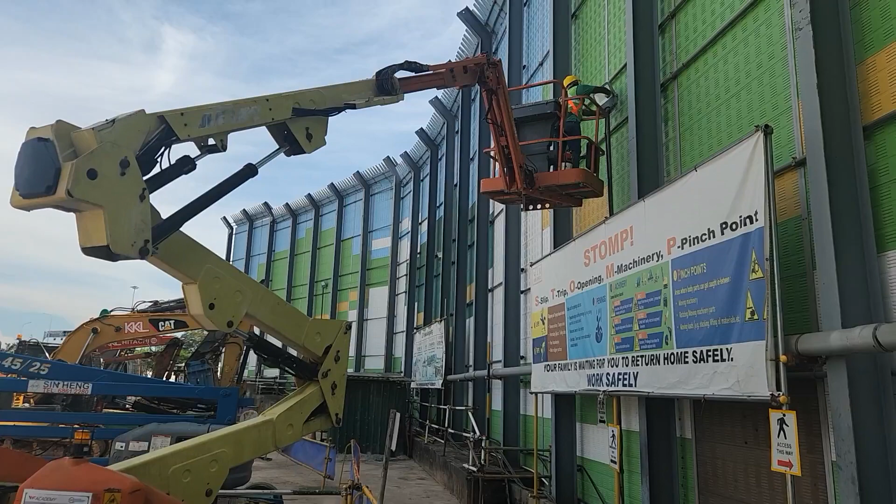Working at height means working at any height from which there is a risk of falling. Work at height is a key area of concern for workplace safety in Singapore, as falls from height have been the top contributor to workplace deaths in Singapore over the years.

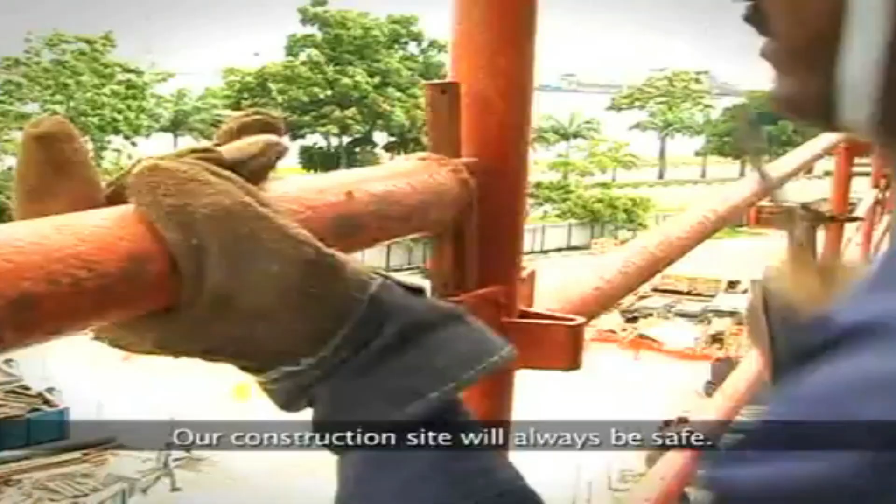Working at heights is an activity we can't avoid because of the nature of our work. However, we can work at heights safely if we have all the necessary controls in place before we begin working at heights. In this video, we will discuss the hierarchy of control for safe working at heights and the different types of fall prevention systems.

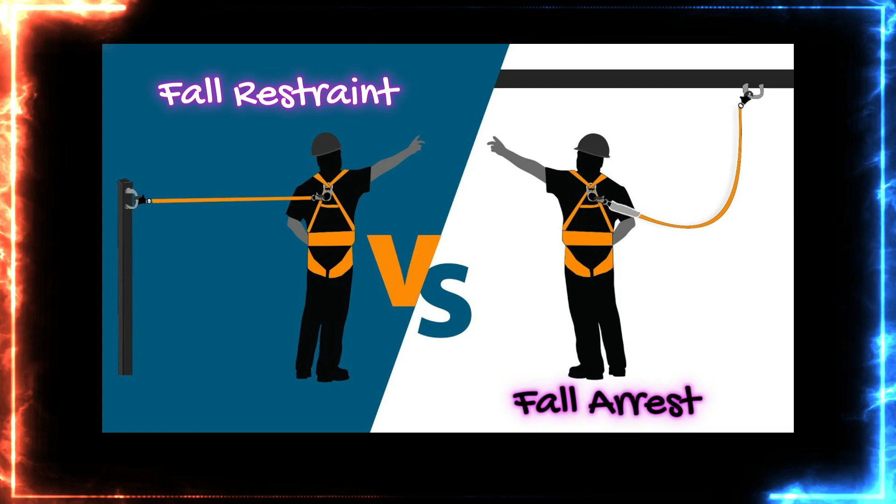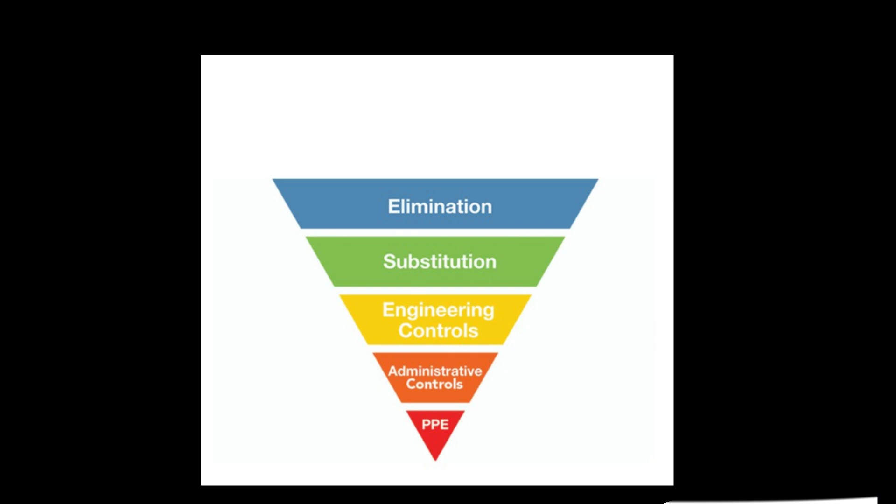Let's start with the hierarchy of controls. The hierarchy of controls is a method of identifying the most effective method to protect workers from falling from heights. They are arranged from the most effective methods to protect the worker from falling from height to the least effective methods. They are elimination, which is most effective, that all hazards of working at height are removed.

Followed by substitution, which can be achieved by changing the process to replace the hazard with one that presents a lower risk. Engineering controls, which prevent hazards from contacting workers by physical means that reduce the likelihood of falling from heights. Administrative controls, which are procedures, training or warnings that raise safety awareness when working at heights and reduce exposure to the hazard by following procedures.

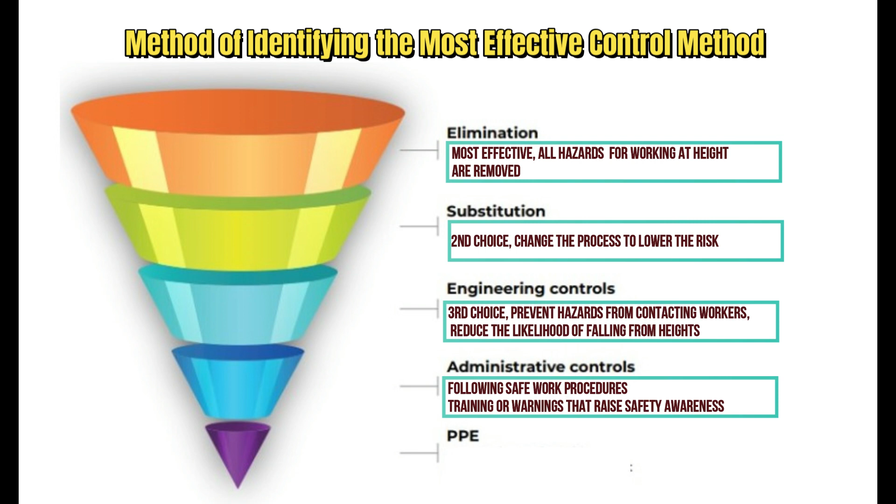Personal protective equipment, which are devices for protecting workers, such as lifelines and safety harnesses. They should be used only as a last resort and may be necessary at the same time as other control measures. Wherever possible, we should always use the most effective control method in all our work at heights.

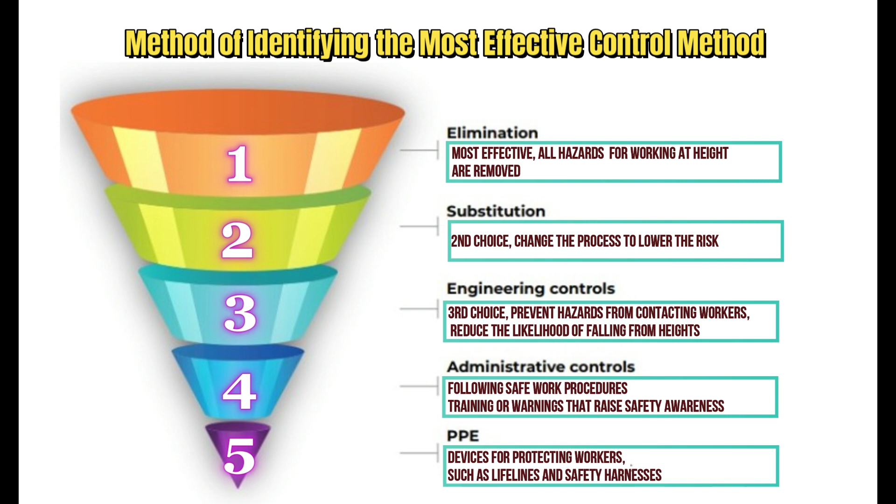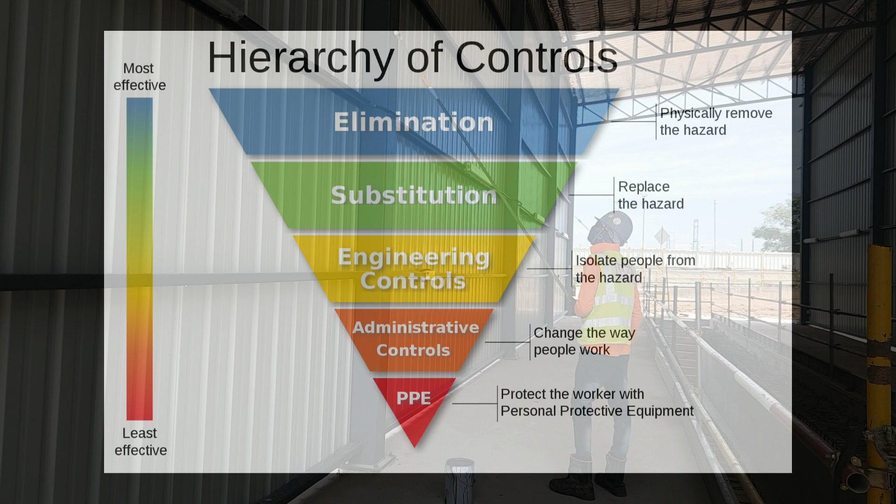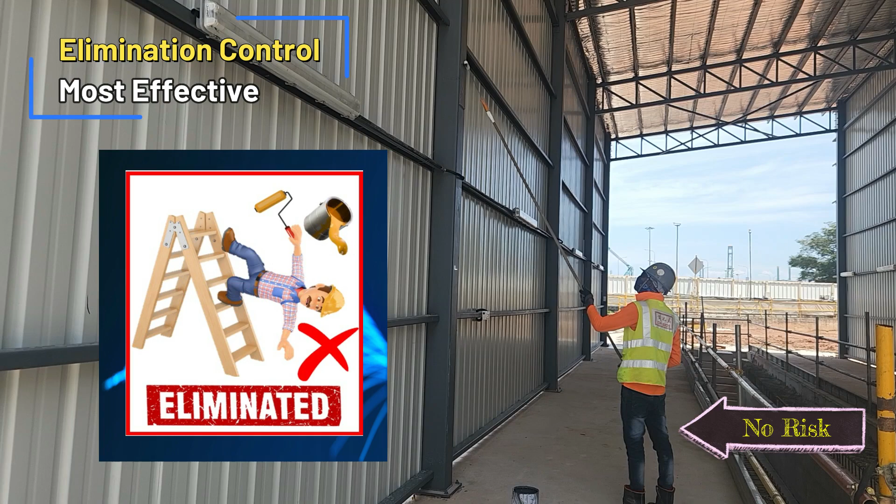Next, let's look at some examples of how to apply the hierarchy of control for working at height. Let us begin with the most effective control, that is, elimination. Elimination control provides the highest level of protection and the most effective control. As you can see from the video, the worker uses a paint pole and stands on the ground to do the painting work instead of working at height. By using this control, the hazard of working at heights has been removed, so there is no risk of falling from heights.

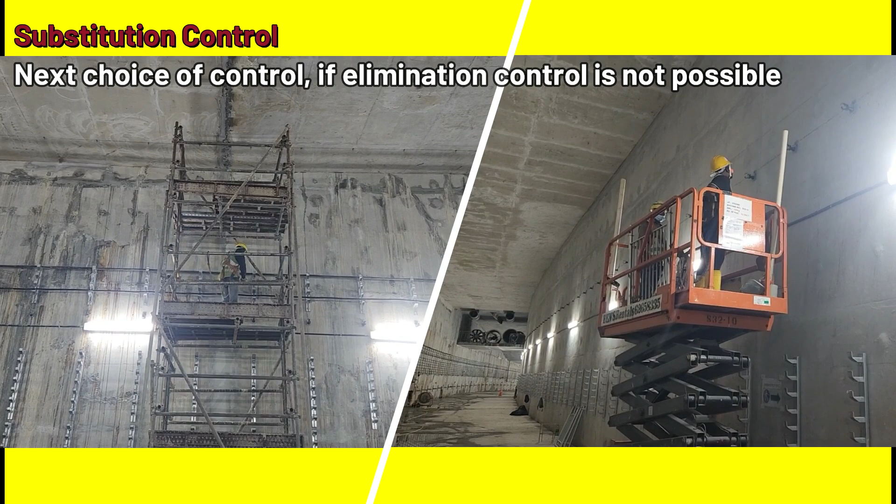Let's go on to substitution control. Substitution control should be the next choice of control if elimination control cannot be implemented for the job. Substitution controls are to use a safer alternative or to change the work process to reduce the risk of falling from height. In this video you can see that a MEWP is used for working at height. The MEWP offers greater stability for working at heights than using ladders or scaffolding, thereby reducing the risk of falling from heights.

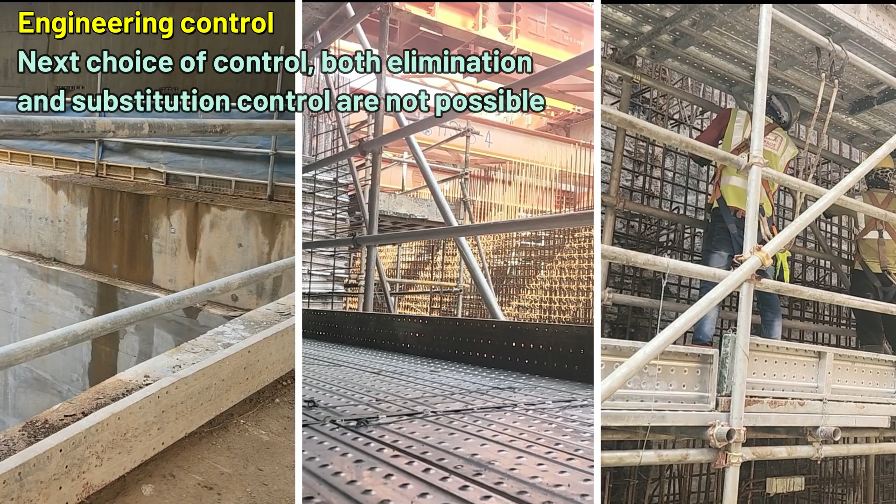Next, engineering control. If both elimination and substitution control are not possible, the next level of control to apply will be engineering control. It's the most common type of control. Engineering controls are physical means such as barricades, safe working platforms and scaffolding that allow workers to work safely at height and protect them from falling. This control helps reduce the likelihood of falling from height.

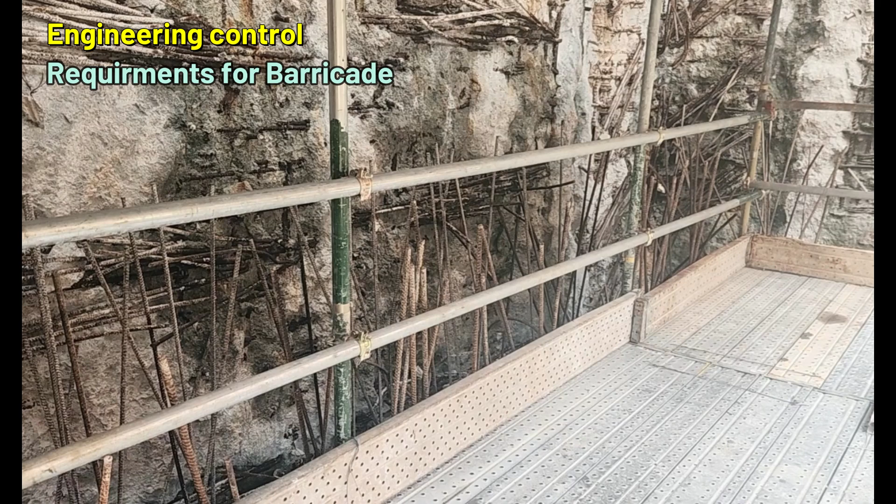This is the standard requirement of barricades. 1. There should be a toe board of at least 90 mm to prevent falling objects. 2. The mid-rail must not be more than 600 mm above the ground. And 3. The guardrail must be at least 1 meter high and not more than 600 mm above the mid-rail.

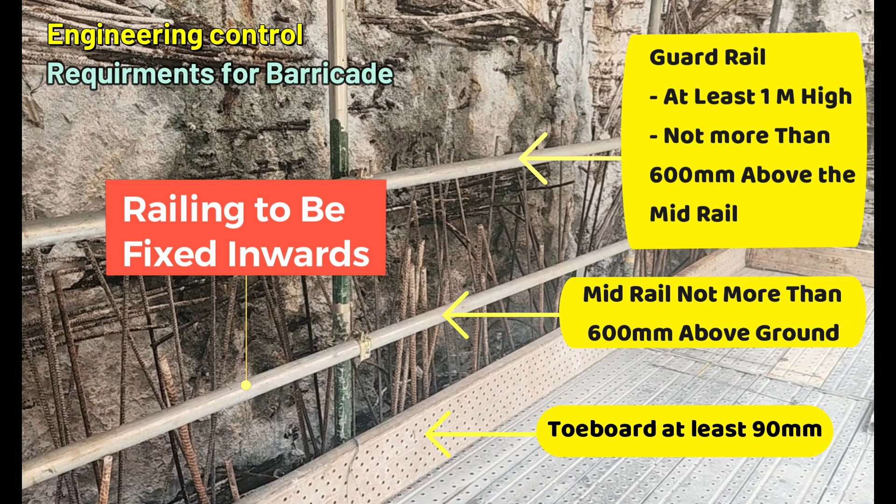Additionally, the railing must be fixed inward and not outward to prevent falling objects during installation and dismantling. Note that all barricades provided as fall protection must be able to withstand a minimum of 100 kilograms force.

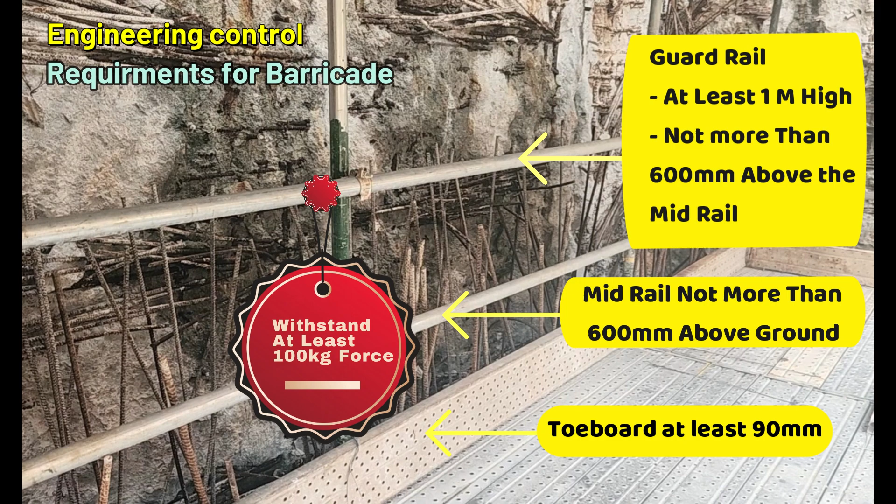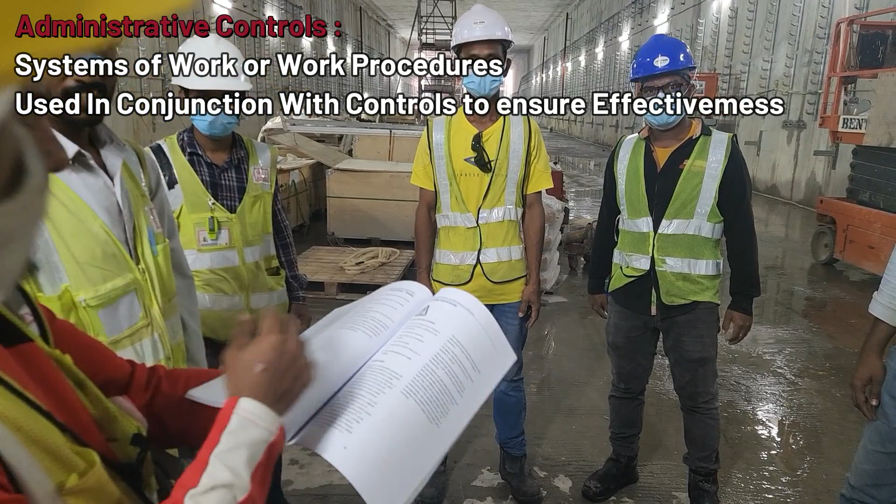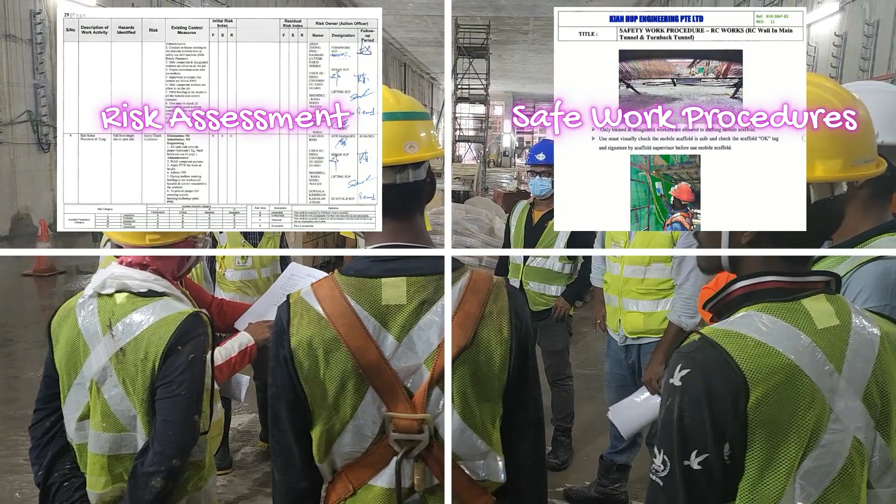Next, administrative control. Administrative controls cover the systems of work or work procedures that reduce the exposure of persons to the risks of falling. These will include a risk assessment, safe work procedures, fall protection plan, and permit to work.

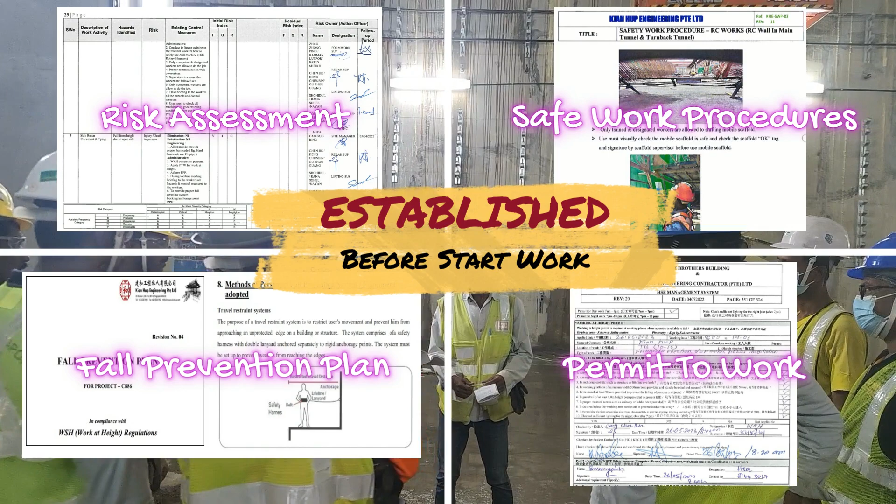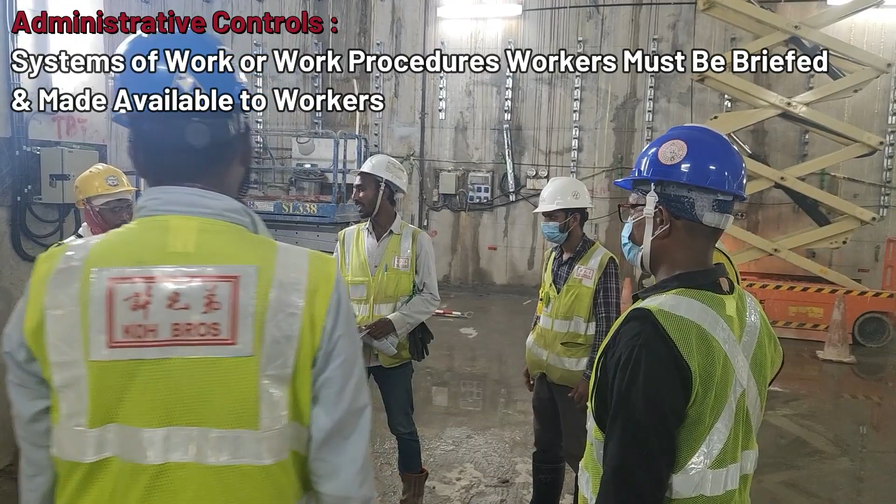Prior to any work at heights, all work systems and procedures must be established to ensure that all hazards associated with work activities are addressed effectively. The work system and procedures need to be briefed and made available to workers involved in working at heights, so that they know how to perform the work at heights safely.

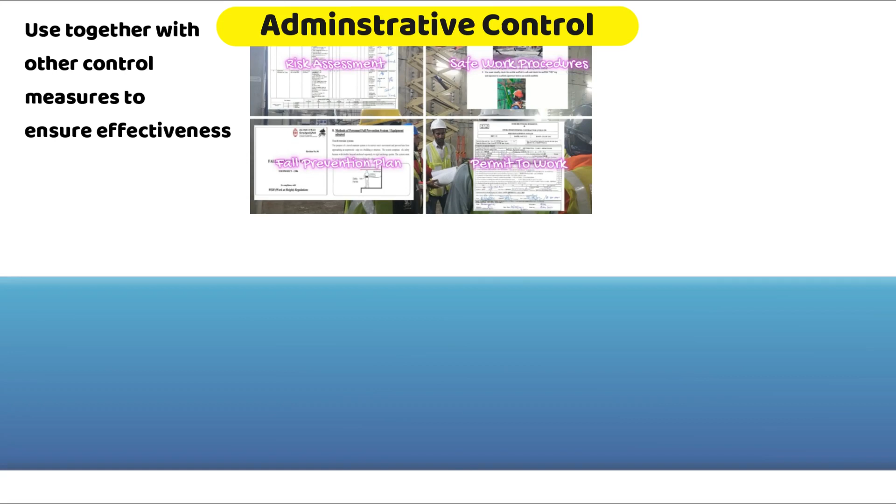Administrative control must not be used alone. It must be used in conjunction with elimination, substitution, engineering or PPE control to ensure effectiveness.

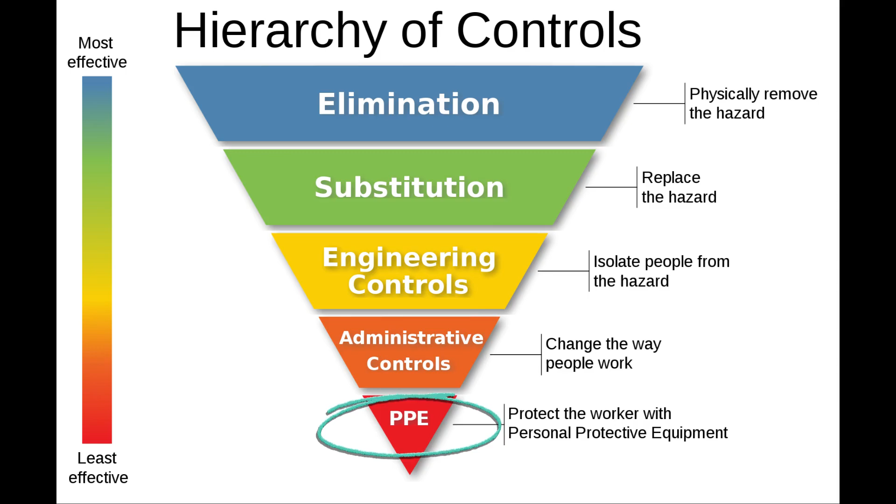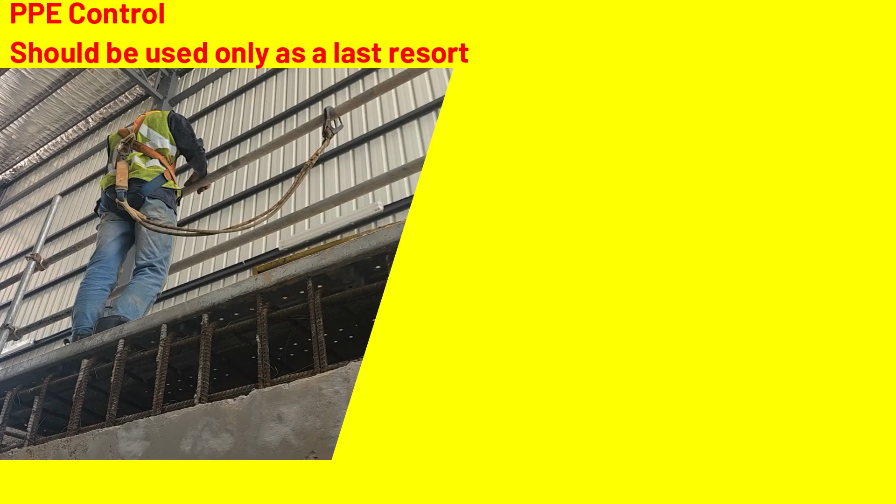Then we have the Personal Protective Equipment control, PPE. PPE control should be used only as a last resort, after all other control measures have been considered. It should be used as a short-term contingency or as an additional protective measure. The effectiveness of PPE control is dependent on the correct equipment being chosen, fitted, and worn properly at all times.

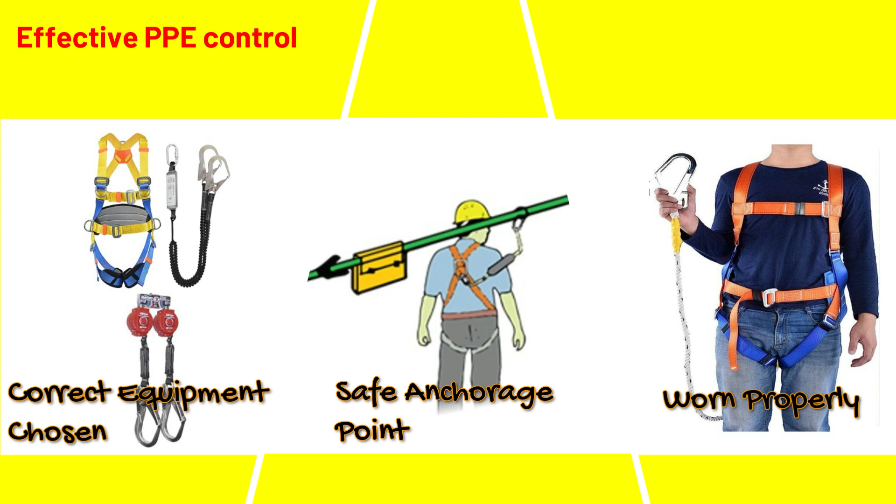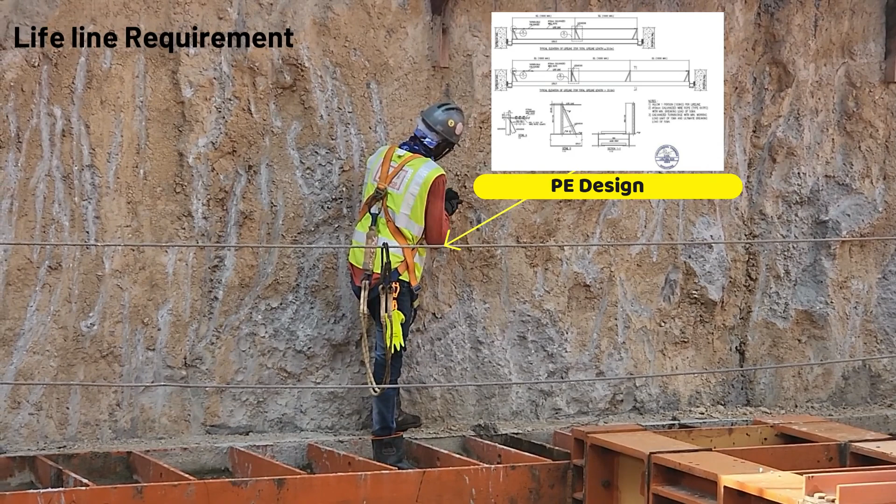Note that all lifelines used for anchorage are to be designed by a professional engineer, PE, installed according to the PE design and certified safe to be used by the PE. To ensure all hazards are adequately addressed and risks are being brought down as low as possible, a combination of control measures should be applied to the work at heights.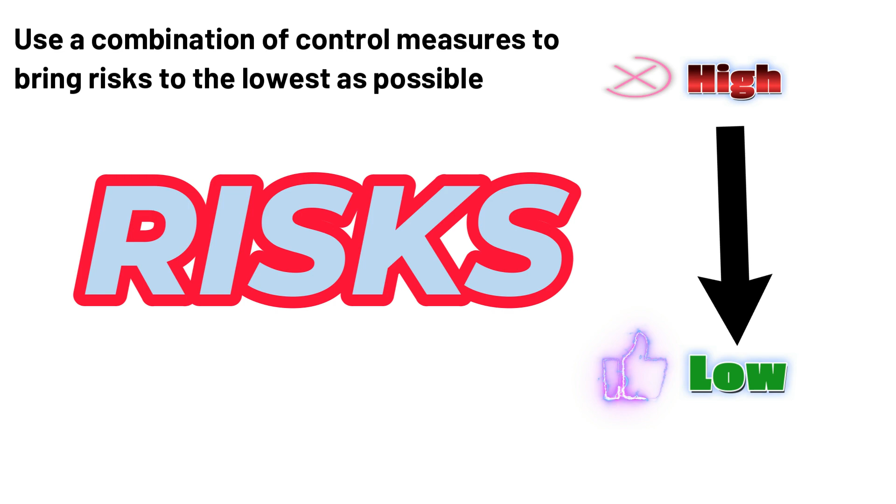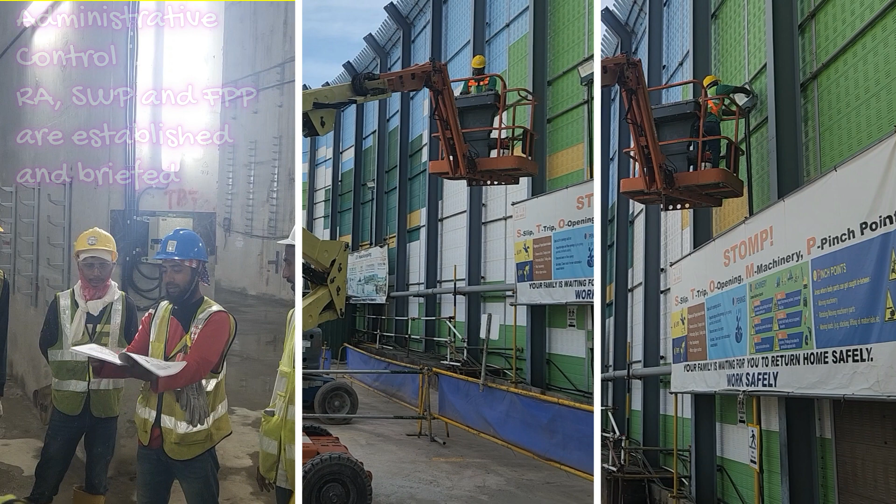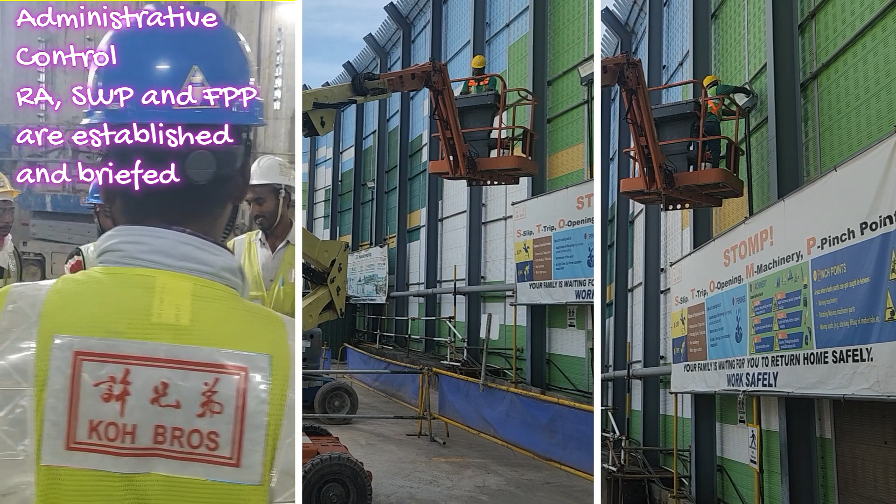Let's look at the examples of a combination of control measures being applied for one work activity. First example, changing a floodlight. Administrative control: risk assessment, safe work procedures and fall protection plan are established and briefed to all workers working at heights prior to commencement of work. Substitution control: using a boom lift, a safer method to reduce the risk of falling from height. PPE control: anchoring safety harness to a secure anchorage for fall arrest.

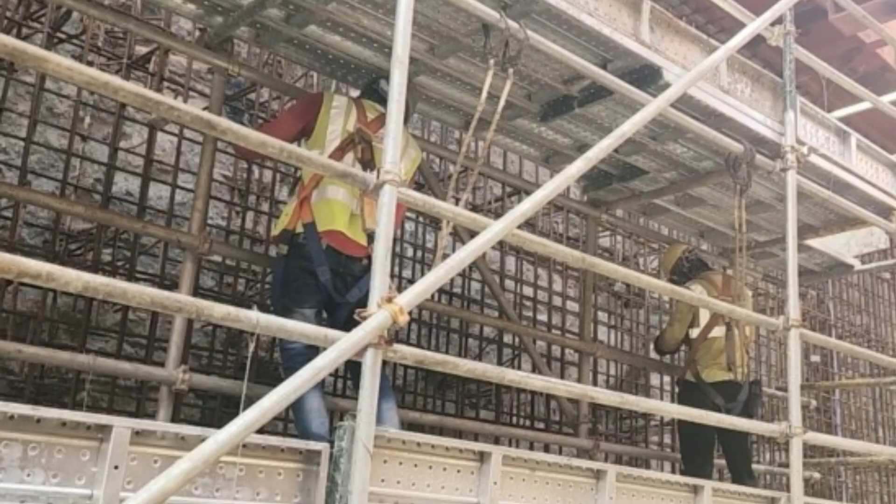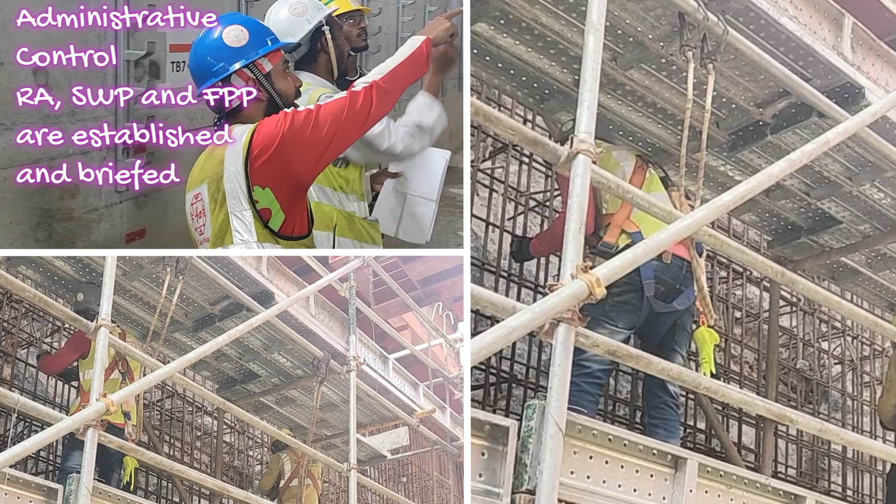Second example, wall rebars work. Administrative control: risk assessment, safe work procedures and fall protection plan are established and briefed to all workers working at heights prior to commencement of work. Engineering control: scaffolding with proper barricade and work platform for protecting workers from falls. PPE control: anchoring safety harness to a secure anchorage for fall arrest.

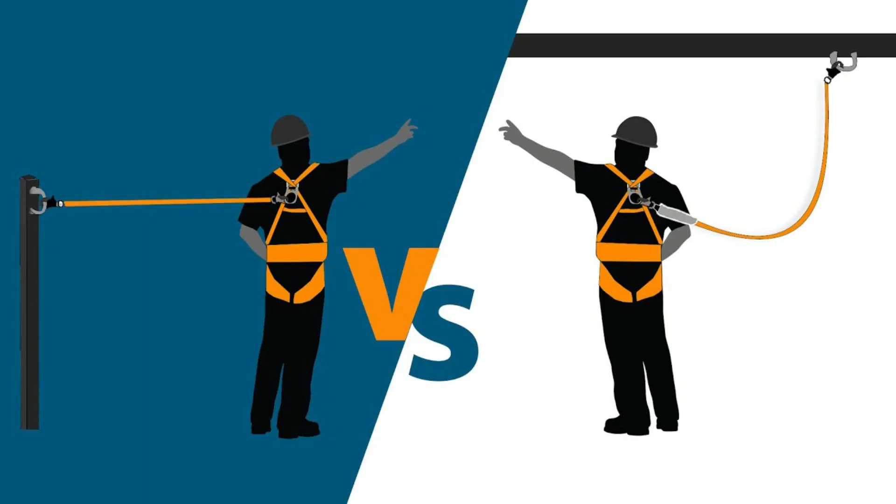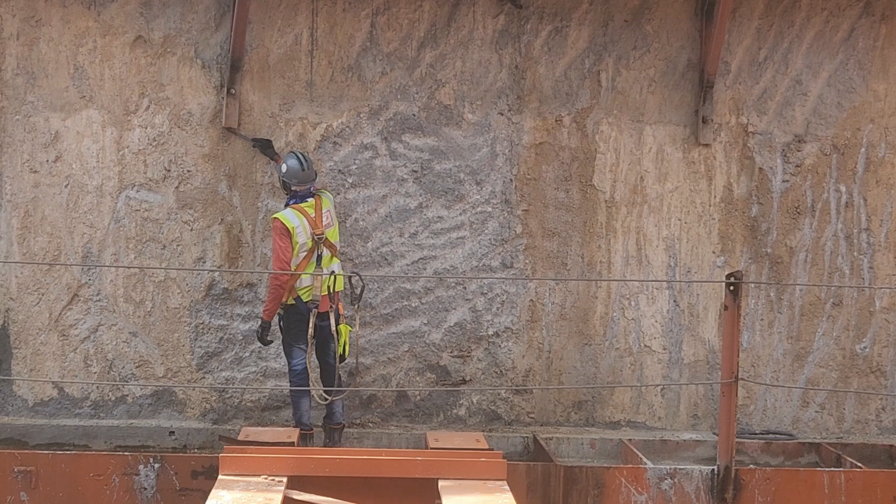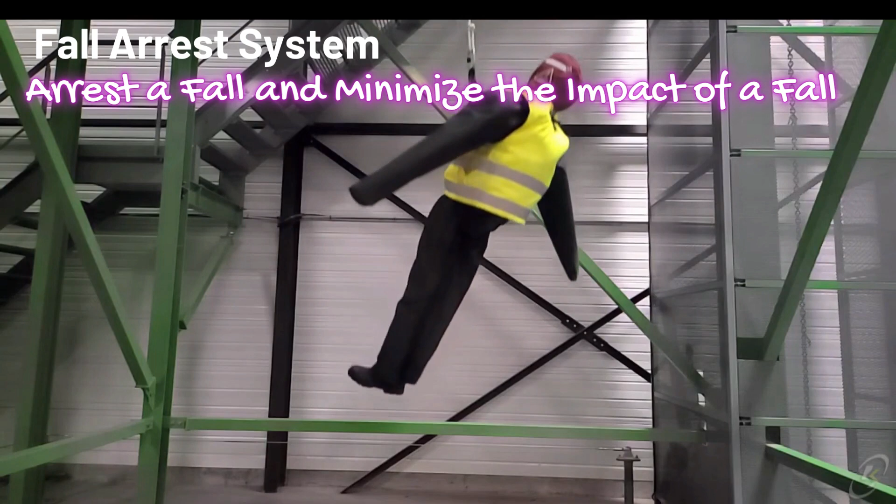Now, let us look at the different types of fall protection systems. They are the fall arrest system and the travel restraint system. Let's start with the fall arrest system. The fall arrest does not prevent a fall from occurring, but keeps a person from hitting the ground during a fall and minimizes the impact of a fall. It comprises three parts.

1. The anchorages, which are the anchor point or the lifeline. 2. The body support, which is the body harness. 3. The connections, which are the lanyard and shock absorber that connect the body harness to the anchorage point.

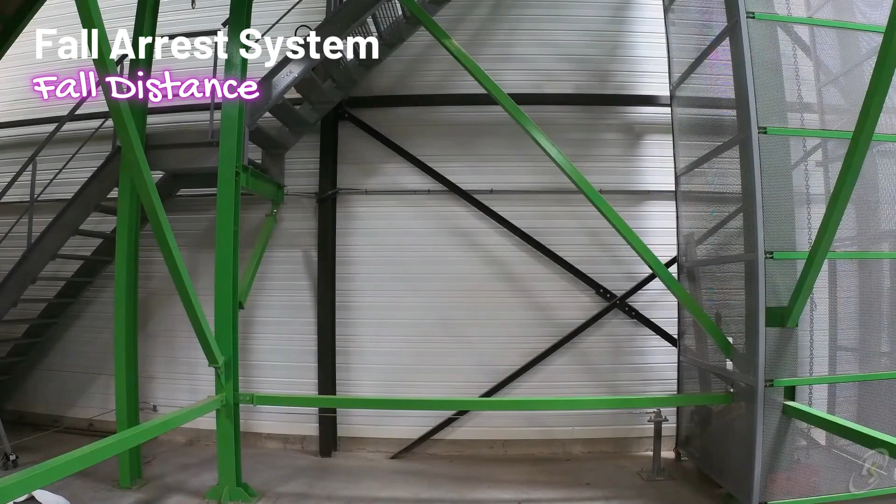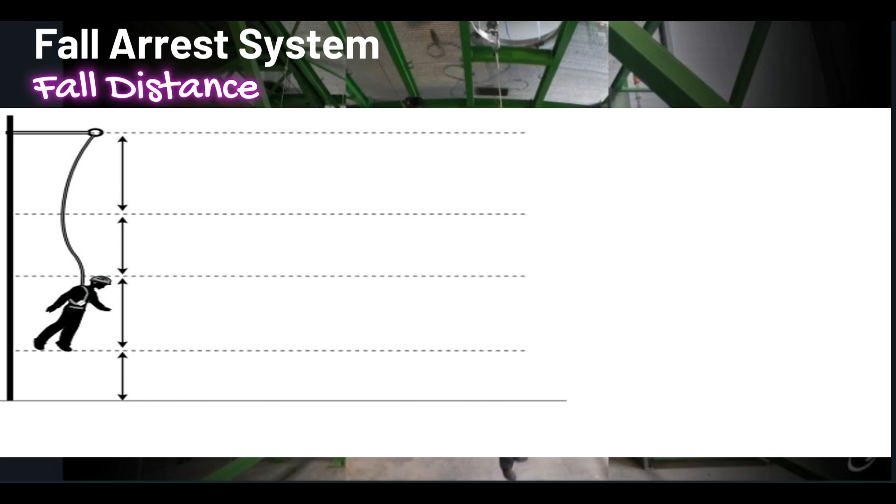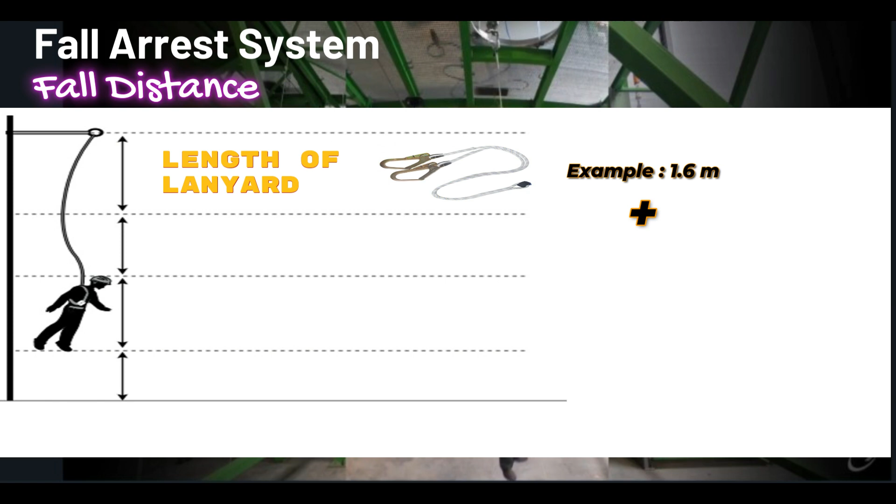When using a fall arrest system, it is always important to calculate the fall distance. This is how fall distances are calculated. Firstly, the length of the lanyard, for example 1.6 meters. Second, the length of the shock absorber after deployment, for example 1 meter. Third, a person's height, for example 1.7 meters.

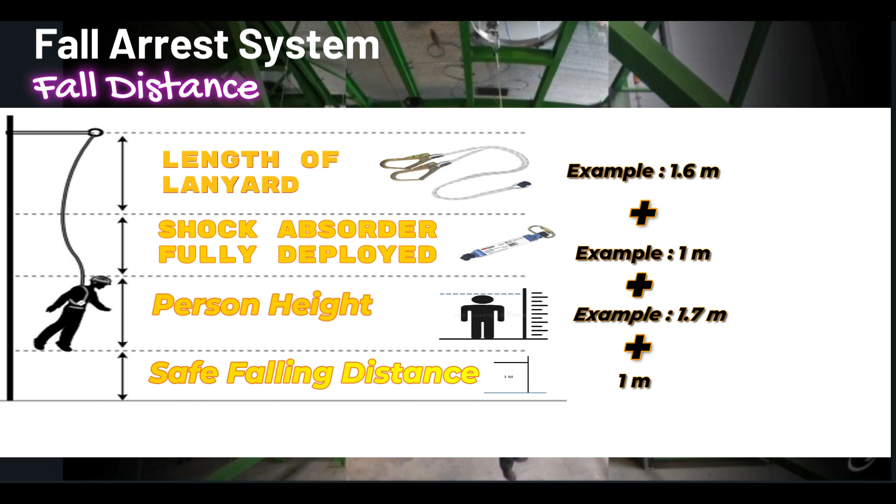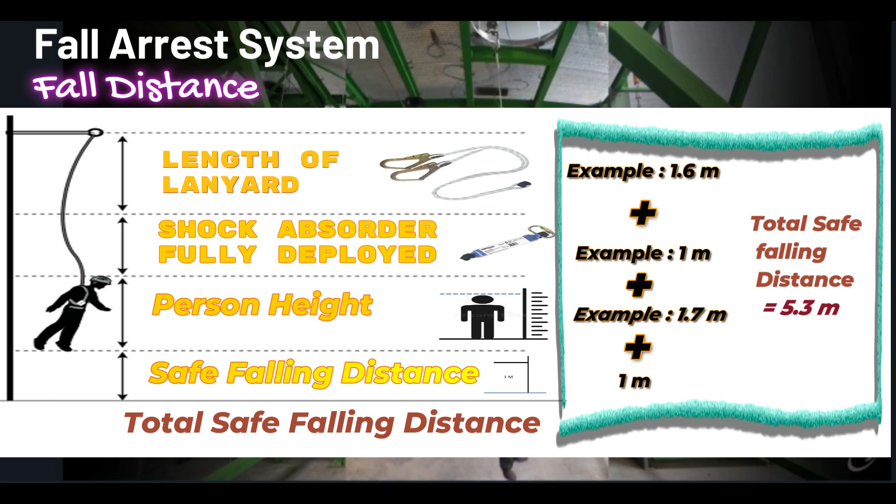Fourth, add a safe falling distance of 1 meter. With all 4 components added together, that is the safe falling distance when using the fall arrest system. And based on the example given, the safe falling distance is 5.3 meters. When anchoring the safety harness, always anchor it high when possible, as this will reduce the fall factor and the impact of the fall. Always practice 100% tie-off when using the fall arrest system.

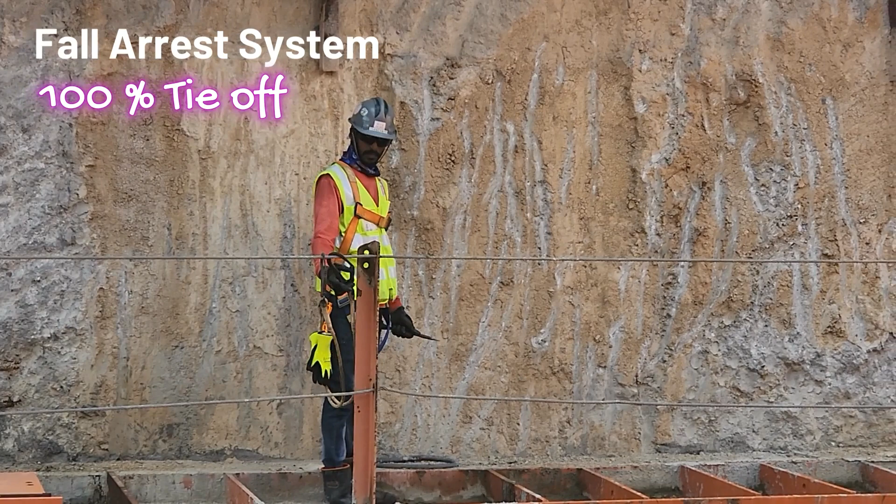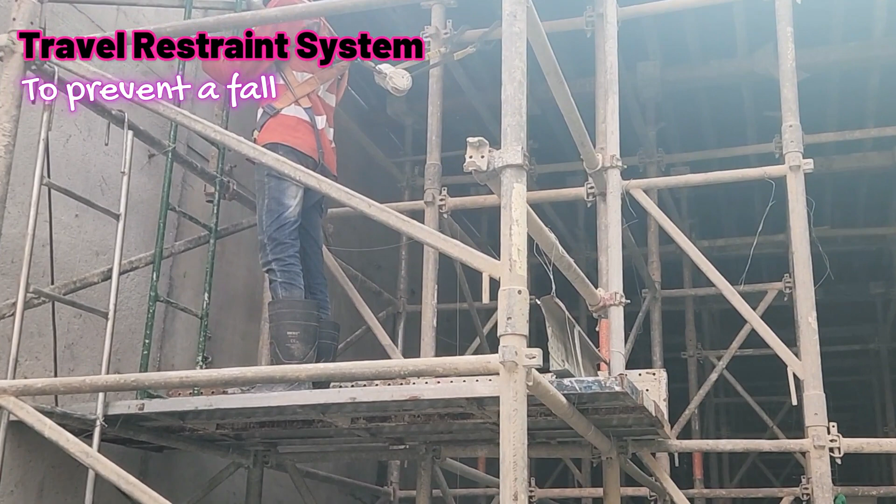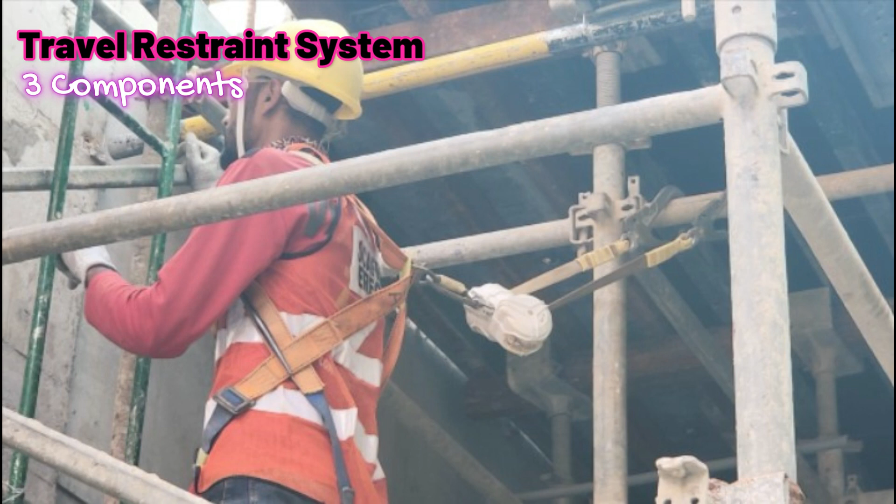Now let's talk about the travel restraint system. The travel restraint system is designed to limit the distance a person can travel, to prevent a fall. The system commonly used in our worksite is the self-retractable lifeline and lanyard system. The system is made up of 3 parts. 1. The body harness. 2. An anchorage point. And 3. The self-retractable lifeline or lanyard, which is attached to the full body harness and anchor point.

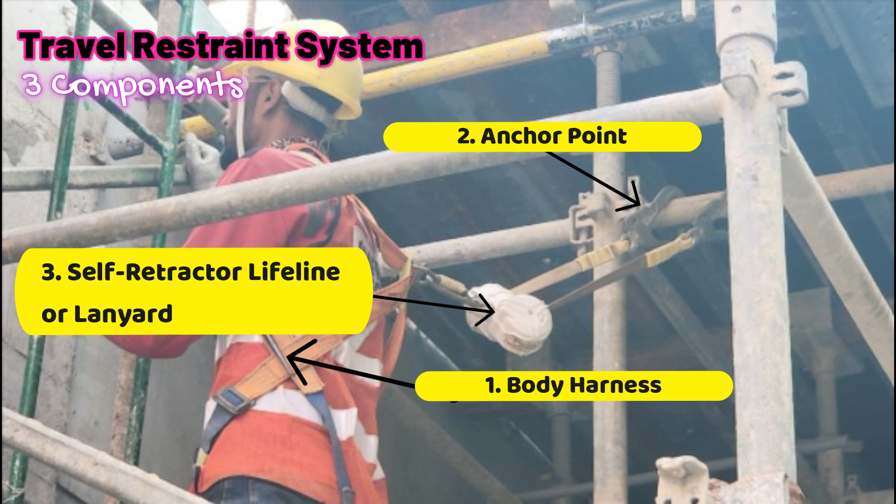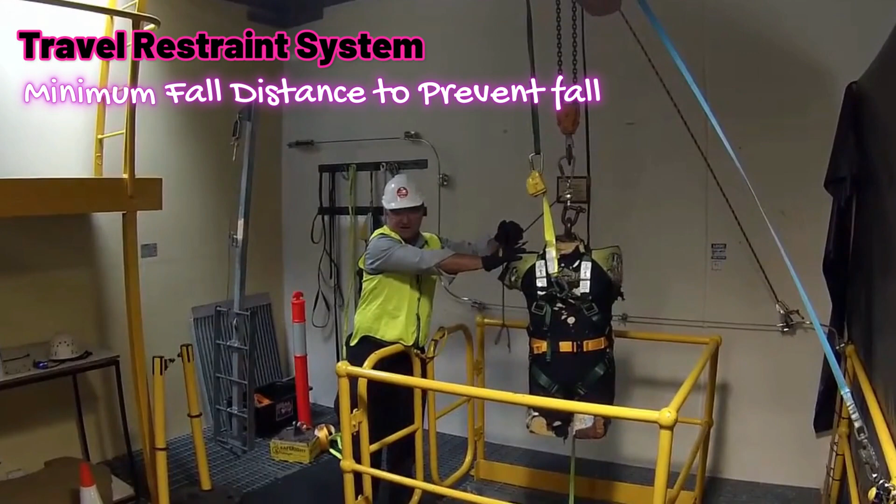The self-retractable lifeline and lanyard provide rapid stopping power to prevent a person from falling from height. Let's take a look at this fall test using a self-retractable lanyard. The fall distance is kept to the minimum to prevent a person from falling.